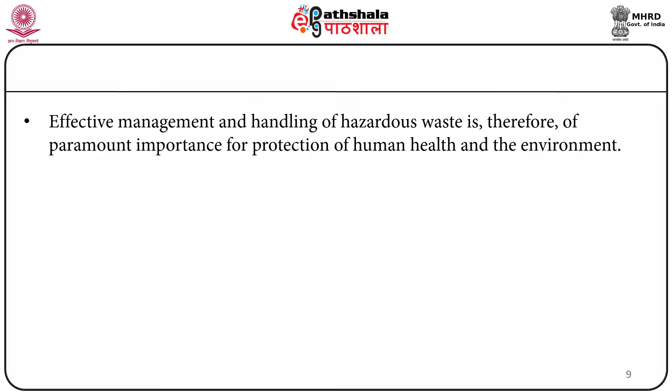The hazardous waste can cause or significantly contribute to an increase in mortality or an increase in serious illness. They can pose a substantial present or potential hazard to human health or the environment when it is improperly treated, stored, transported, disposed of, or otherwise managed. Effective management and handling of hazardous waste is therefore of paramount importance for protection of human health and the environment.

In India, rapid economic growth is leading to urbanization and industrialization, generating large amounts of waste, which is adversely affecting the environment. The Hazardous Waste Management, Handling and Transboundary Movement Rules 2008 are the primary regulations addressing the management of hazardous waste in India.

What is hazardous waste? How to define it? From the viewpoint of application of the hazardous waste management and handling rules, waste can be classified as hazardous if the waste substance is solid, semi-solid, or non-aqueous liquid which, because of its quantity, concentration, or physical, chemical, or infectious characteristics may cause or significantly contribute to an increase in mortality or an increase in serious, irreversible, or incapacitating reversible illness, or pose a substantial present or potential hazard to human health or the environment when it is improperly treated, stored, transported, or disposed of or otherwise managed.

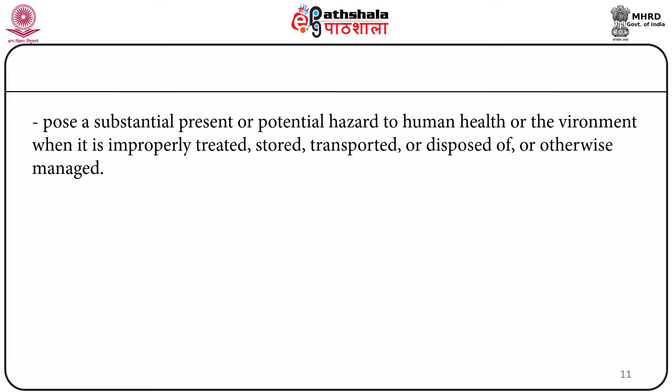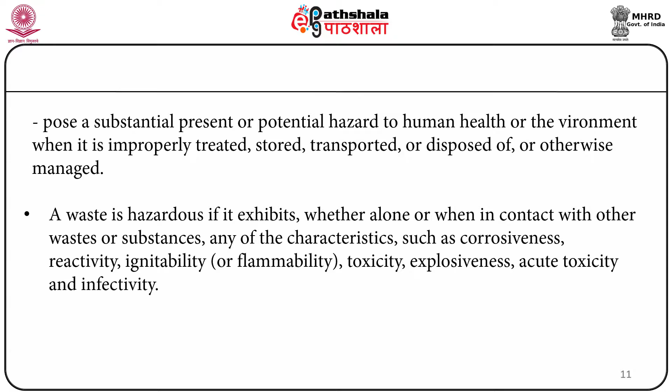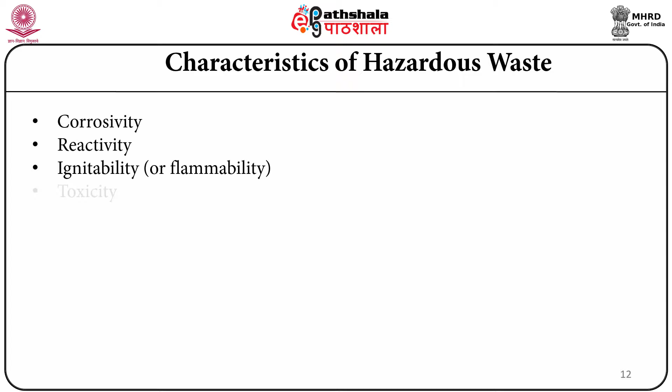A waste is hazardous if it exhibits, whether alone or when in contact with other waste or substances, any of the characteristics such as corrosiveness, reactivity, ignitability or flammability, toxicity, explosiveness, acute toxicity, and infectivity. What are the characteristics of hazardous waste? These are corrosivity, reactivity, ignitability or flammability, toxicity, explosiveness, acute toxicity, infectivity.

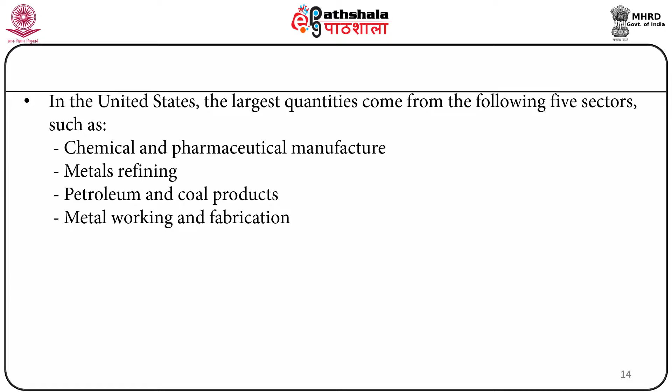In the United States, the largest quantities come from the following 5 sectors, such as chemical and pharmaceutical manufacture, metals refining, petroleum and coal products, metal working and fabrication, rubber and plastics manufacture.

Most hazardous waste in India are generated by highly polluting industries that fall into 17 major categories. And these are aluminium smelter, caustic soda, cement, copper smelter, distilleries, drugs and pharmaceuticals, dyes and dye intermediates, fertilizer, integrated iron and steel, leather processing including tanneries, oil refineries, pesticides, petrochemicals, pulp and paper, sugar, thermal power plants, and zinc smelter.

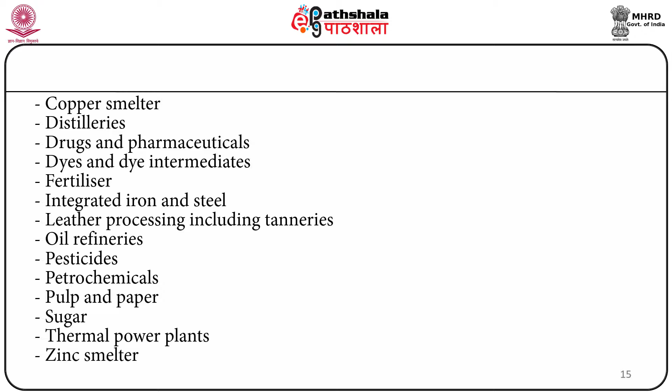Next, classification of hazardous waste. Hazardous waste can be classified by list, for example, United States Environmental Protection Agency list. It can be classified by origin, for example, specific processes generating hazardous waste. Classification by hazardous characteristics, for example, toxic waste, reactive waste. Classification by chemical, biological and physical properties, for example, inorganic waste, organic waste.

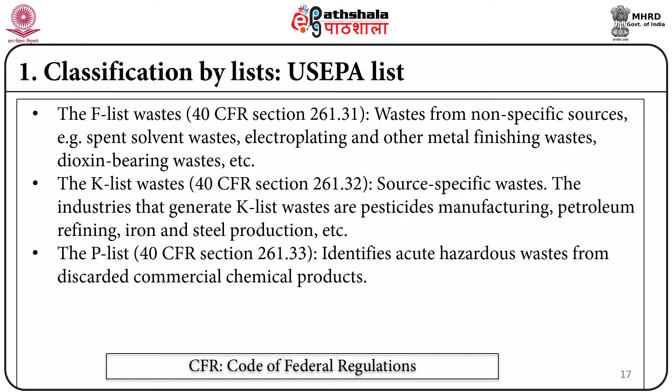First, classification by list, that is USEPA list. The F list: waste from non-specific sources, for example, spent solvent waste, electroplating and other metal finishing waste, dioxin bearing waste, etc. Next, the K list waste. Those are source-specific waste. The industries that generate K-list waste are pesticides manufacturing, petroleum refining, iron and steel production, etc.

The P-list identifies acute hazardous waste from discarded commercial chemical products. And lastly, the U-list identifies hazardous waste from discarded commercial chemical products. Here, CFR denotes Code of Federal Regulations.

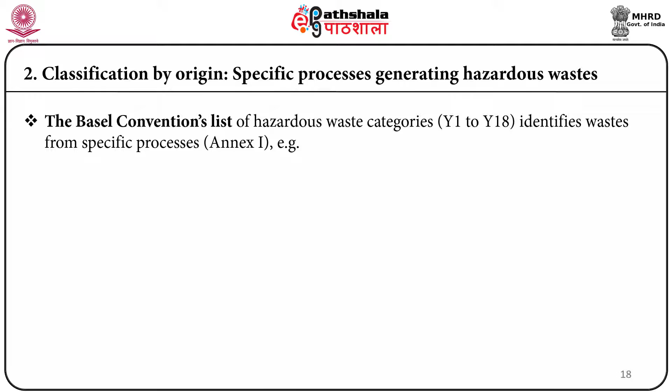Next, classification by origin, that is specific processes generating hazardous waste. The Basel Convention's list of hazardous waste categories Y1 to Y18 identifies waste from specific processes. For example, Y1 denotes clinical waste, Y6 denotes waste from the production and use of organic solvents, and Y18 denotes residues from industrial waste disposal operations.

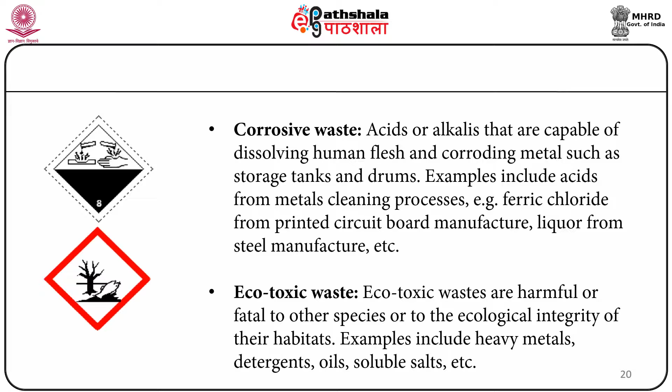Reactive waste are unstable under normal conditions, can cause explosions, toxic fumes, gases, or vapors. Examples include peroxide solutions, hypochlorite solutions, or solids, etc. Next, corrosive waste. Acids or alkalis that are capable of dissolving human flesh and corroding metals such as storage tanks and drums. Examples include acids from metals cleaning processes, for example, ferric chloride from printed circuit board manufacture, liquor from steel manufacture, etc. And lastly, ecotoxic waste. These are harmful or fatal to other species or to the ecological integrity of their habitats, and examples include heavy metals, etc.

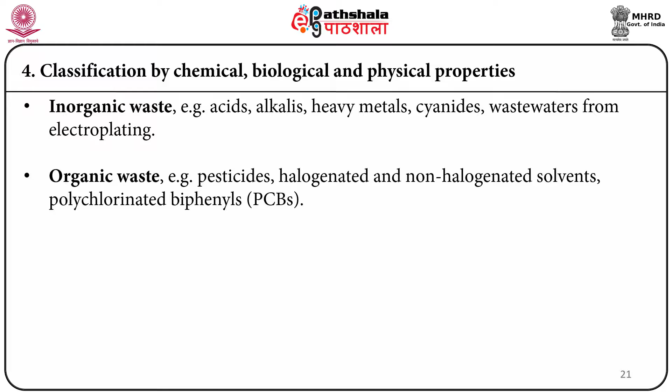Next, classification is possible by chemical, biological, and physical properties of hazardous waste, like inorganic waste, for example, acids, alkalis, heavy metals, cyanides, wastewaters from electroplating; organic waste, for example, pesticides, halogenated and non-halogenated solvents, polychlorinated biphenyls; oily waste, for example, lubricating oils, hydraulic fluids, contaminated fuel oils; and sludge, for example, from metal working, painting, wastewater treatment.

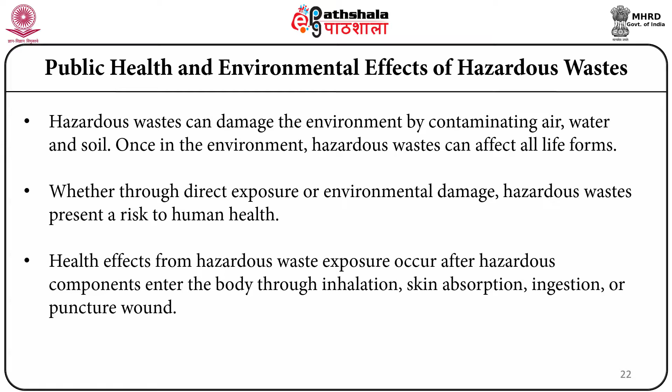Next, coming to public health and environmental effects of hazardous waste. Hazardous waste can damage the environment by contaminating air, water, and soil. Once in the environment, hazardous waste can affect all life forms. Whether through direct exposure or environmental damage, hazardous waste present a risk to human health. Health effects from hazardous waste exposure occur after hazardous components enter the body through inhalation, skin absorption, ingestion, or puncture wound. These threats vary greatly depending on the type of hazardous waste at issue. The health effects of the hazardous waste are also dependent on the amount and routes and duration of exposure.

Temporary health effects of hazardous waste exposure can include dizziness, headaches, and nausea. Prolonged exposure can result in cancers, disabilities, or death. Long-term exposure may also increase the risk of developmental and reproductive disorders, immune system disruption, endocrine disruption, central nervous system disorders. Safety effects resulting from hazardous waste include injury and even death from an explosion, fire outbreak, chemical reaction, or other hazardous situation created by such waste.

Contamination of soil, groundwater, surface water, and other media degrade the functioning of ecosystems by affecting the health of various plant and animal species. The effects vary widely from site to site depending on the species, contaminant, and ecosystem involved. In addition to harming plant and animal communities, these changes can lead to a reduction in the benefits, both direct and indirect, that ecosystems provide to humans.

Next, existing scenario of hazardous waste management in India. As a rapidly developing nation, India is struggling with the growing challenge of managing its hazardous waste.

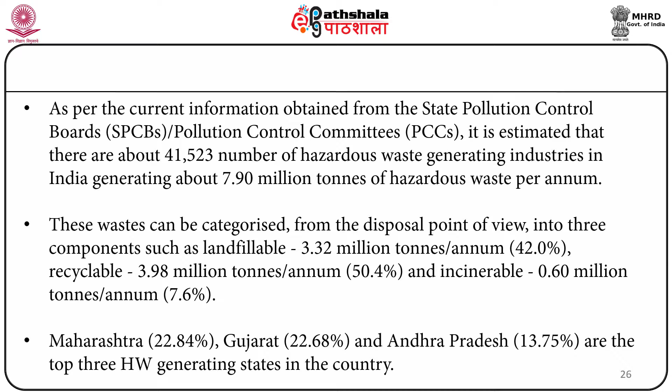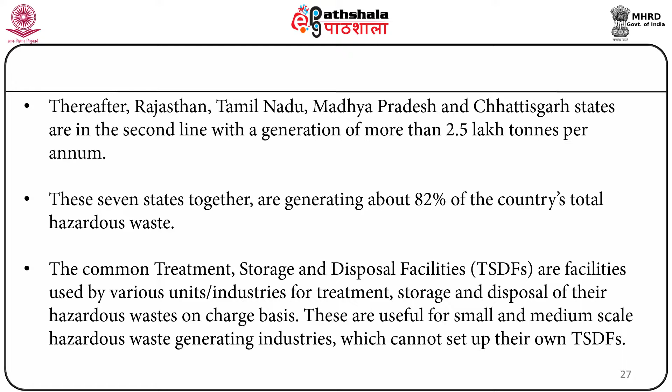tons per annum. Maharashtra, Gujarat, and Andhra Pradesh are the top three hazardous waste generating states in India. Thereafter, Rajasthan, Tamil Nadu, Madhya Pradesh, and Chhattisgarh states are in the second line with a generation of more than 2.5 lakh tons per annum. These 7 states together are generating about 82% of the country's total hazardous waste.

The common treatment, storage, and disposal facilities, that is TSDFs, are facilities used by various units or industries for treatment, storage, and disposal of their hazardous waste on charge basis. These are useful for small and medium scale hazardous waste generating industries which cannot set up their own TSDFs. The common TSDFs may have only secured landfill facilities or both secured landfill and incineration facilities, that is integrated common TSDFs.

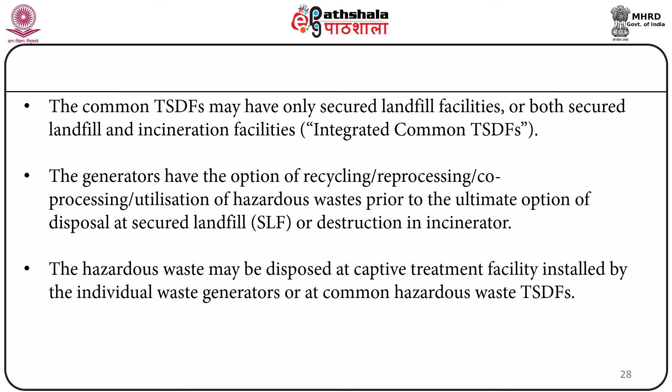The generators have the option of recycling or reprocessing or co-processing or utilization of hazardous waste prior to the ultimate option of disposal at secured landfill or destruction in incinerator. The hazardous waste may be disposed at captive treatment facility installed by the individual waste generators or at common hazardous waste TSDFs. Disposal at TSDFs is advantageous as compared to the captive facility because of reasons such as reduced capital investment, reduced cost of treatment, checking the mushrooming of treatment equipment in an area, easy implementation by the regulatory bodies, etc.

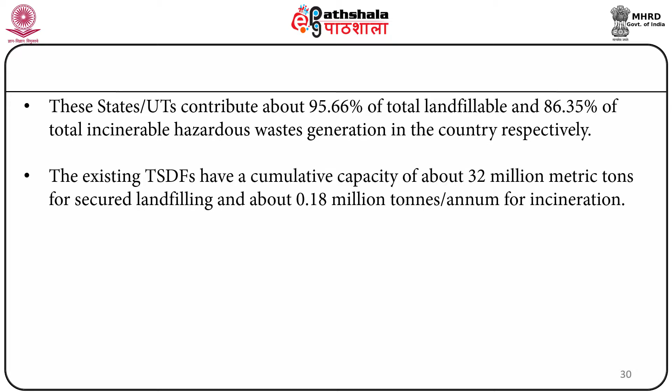The number of TSDFs in the country has increased gradually from 4 facilities in the year 2003 to 38 TSDFs in 16 states or union territories currently. Common facilities for disposing hazardous waste with secured landfills and incinerators are now available in 16 and 12 states or union territories respectively. These states or union territories contribute about 95.66% of total landfillable and 86.35% of total incinerable hazardous waste generation in the country respectively. The existing TSDFs have a cumulative capacity of about 32 million metric tons for secured landfilling and about 0.18 million tons per annum for incineration.

Currently, there are 38 TSDFs including 17 integrated TSDFs with both secured landfill and incineration facilities, 8 TSDFs with only common incineration facilities, and 13 TSDFs with only common secured landfill facilities. A project on GIS, that is Geographical Information Systems based National Hazardous Waste Information System, has been initiated to provide status of hazardous waste management in the country.

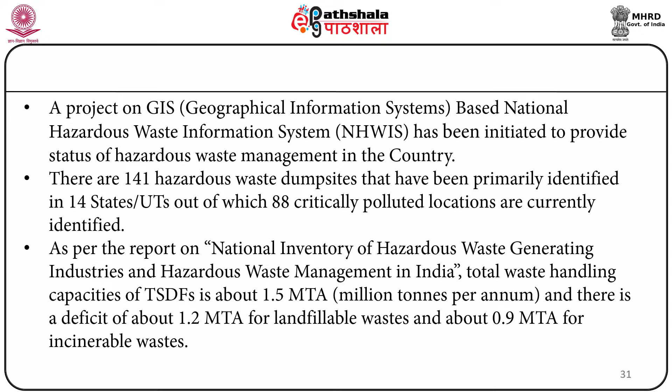There are 141 hazardous waste dump sites that have been primarily identified in 14 states or union territories, out of which 88 critically polluted locations are currently identified. As per the report on National Inventory of Hazardous Waste Generating Industries and Hazardous Waste Management in India, total waste handling capacity of TSDFs is about 1.5 million tons per annum, and there is a deficit of about 1.2 million tons per annum for landfillable waste and about 0.9 million tons per annum for incinerable waste.

Next, handling and management of hazardous waste in India. In India, rapid economic growth coupled with urbanization and industrialization is leading to the generation of large amounts of waste, which needs to be properly handled and managed to reduce its adverse impacts on human health and the environment. National Hazardous Waste Management Strategy incorporates the essence of the National Environmental Policy 2006, relevant multilateral environmental agreements like the Basel Convention, and the national regulations.

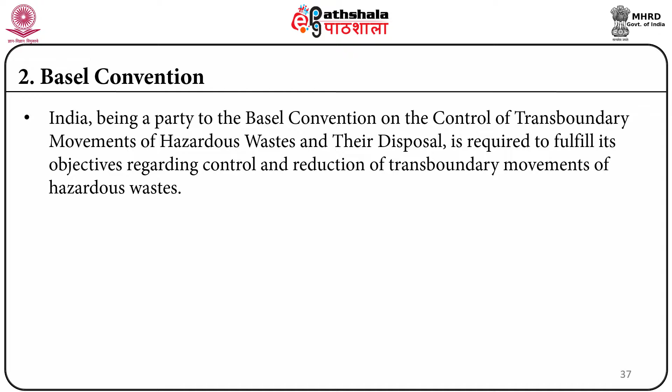Next, Basel Convention. India, being a party to the Basel Convention on the control of transboundary movements of hazardous waste and their disposal, is required to fulfill its objectives regarding control and reduction of transboundary movements of hazardous waste. Other objectives of the Convention include prevention and minimization of generation of such waste, promotion of their environmentally sound management, and active promotion of the transfer and use of cleaner technologies.

Next is regulatory framework. To regulate management of hazardous waste generated within the country as well as export or import of such waste, the Hazardous Waste Management and Handling Rules 1989 were notified under the Environment Protection Act 1986. The rules were amended extensively over the years. The Ministry of Environment and Forest has notified the Hazardous Waste Management, Handling and Transboundary Movement Rules 2008, repealing the earlier rules so as to make the rules more practical and effective in implementation.

The National Hazardous Waste Management Strategy is being finalized for effective management of hazardous waste so as to avoid environmental pollution and adverse effects due to improper handling and disposal. A coordination mechanism for effective implementation of the Hazardous Waste Rules 2008 by the custom authorities at the ports has been established. The Hazardous Waste Rules 2008 are the primary regulations addressing the management of hazardous waste in India. Recycling of e-waste has also been addressed under these rules.

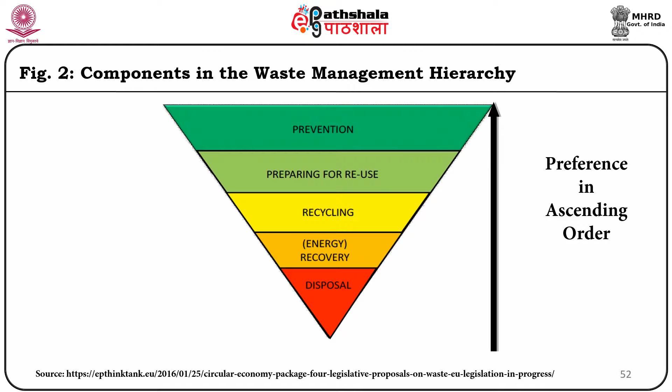This figure shows components in the waste management hierarchy, and here you can see the preferences have been shown in ascending order. The first option should be prevention, followed by preparing for reuse, recycling and recovery, and the disposal should be the last.

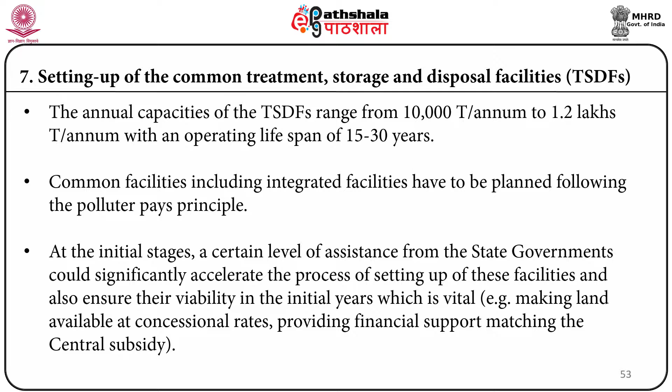Next, setting up of the common treatment, storage and disposal facilities. The annual capacities of the TSDFs range from 10,000 tons per annum to 1.2 lakhs tons per annum with an operating lifespan of 15 to 30 years. Common facilities, including integrated facilities, have to be planned following the polluter pays principle. That is, the principle which makes the polluter responsible for the pollution they have produced. They should pay for the damage they have made by producing pollution.

At the initial stages, a certain level of assistance from the state government would significantly accelerate the process of setting up of these facilities and also ensure their viability in the initial years, which is vital. For example, making land available at concessional rates, providing financial support matching the central subsidy. Location of TSDF should be close to the sources of generation.

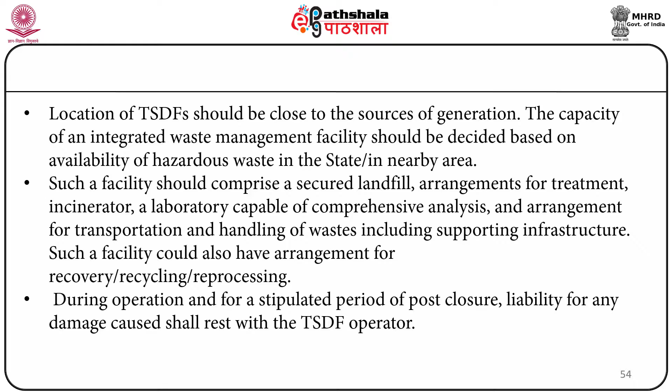The capacity of an integrated waste management facility should be decided based on availability of hazardous waste in the state or in nearby area. Such a facility should comprise a secured landfill, arrangements for treatment, incinerator, a laboratory capable of comprehensive analysis and arrangement for transportation and handling of waste, including supporting infrastructure. Such a facility could also have arrangement for recovery, recycling or reprocessing. During operation and for a stipulated period of post-closure, liability for any damage caused shall rest with the TSDF operator.

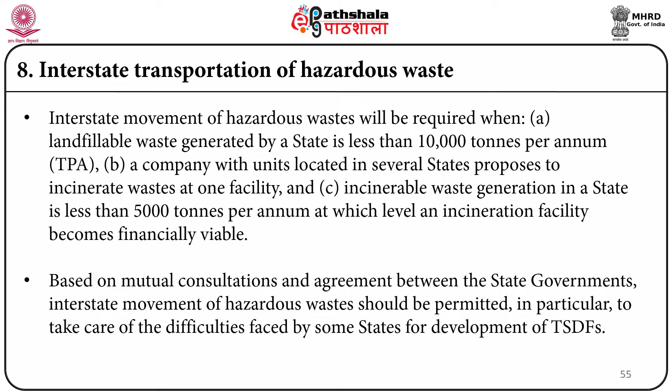Next is interstate transportation of hazardous waste. Interstate movement of hazardous waste will be required when landfillable waste generated by a state is less than 10,000 tons per annum, a company with units located in several states proposes to incinerate waste at one facility, and incinerable waste generation in a state is less than 5,000 tons per annum, at which level an incineration facility becomes financially viable. Based on mutual consultations and agreement between the state governments, interstate movement of hazardous waste should be permitted, in particular to take care of the difficulties faced by some states for development of TSDFs.

For proper tracking of hazardous waste disposal in an environmentally sound manner by the SPCBs or PCCs, the manifest system, that is the movement document of hazardous waste, shall be followed as per the hazardous waste regulations. The SPCB or PCC should develop an online tracking system for movement of hazardous waste from generation to the disposal, recovery or recycle stage.

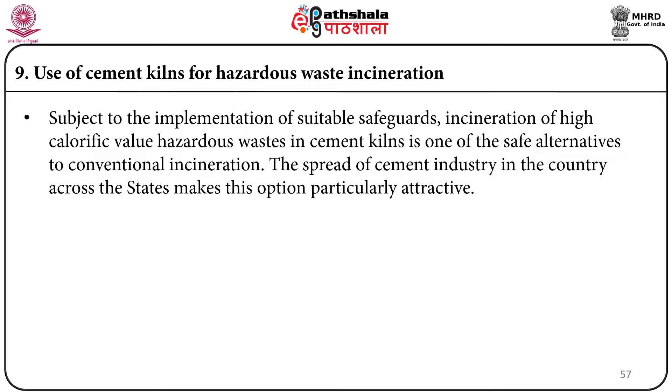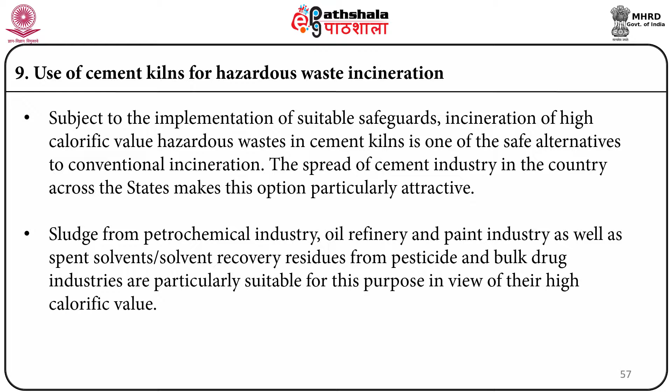Next is use of cement kilns for hazardous waste incineration. Subject to the implementation of suitable safeguards, incineration of high calorific value hazardous waste in cement kilns is one of the safe alternatives to conventional incineration. The spread of cement industry in the country across the states makes this option particularly attractive. Sludge from petrochemical industry, oil refinery and paint industry as well as spent solvents or solvent recovery residues from pesticide and bulk drug industries are particularly suitable for this purpose in view of their high calorific value.

Next is illegal dump sites and remediation. Remediation or rehabilitation of dump sites should be based on scientific assessment of contamination of soil and groundwater and based on modeling the projected future damage.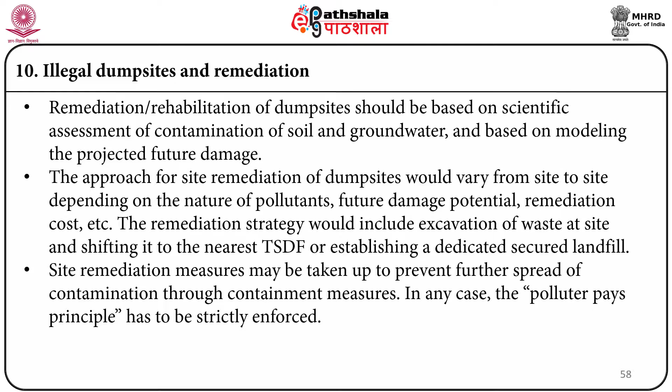The approach for site remediation of dump sites would vary from site to site depending on the nature of pollutants, future damage potential, remediation cost, etc. The remediation strategy would include excavation of waste at site and shifting it to the nearest TSDF or establishing a dedicated secured landfill. Site remediation measures may be taken up to prevent further spread of contamination through containment measures. In any case, the polluter pays principle has to be strictly enforced.

Next is strengthening of infrastructure of regulatory bodies. The mantle of hazardous waste management regulation is primarily on the SPCBs at the state level. For effective discharge of their responsibility, the boards have to be strengthened in terms of manpower, equipment, instruments, and other infrastructure facilities. The Customs Department plays an important role in regulating import of hazardous waste into the country.

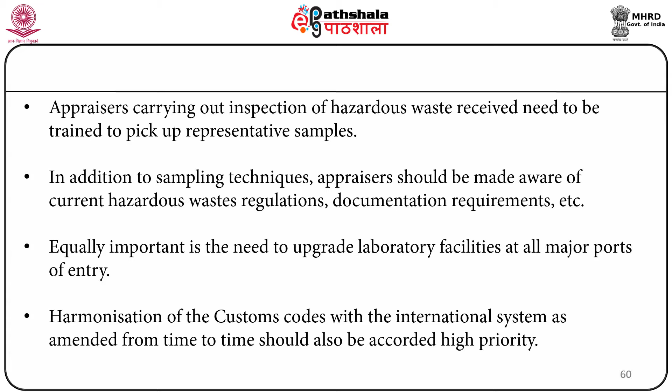Priority areas for action include harmonization of EXIM, that is the export-import policy regulations, with the provisions of the hazardous waste rules, training of the Customs Department personnel engaged in inspection and sampling, and also upgradation of the Customs Department laboratories. Appraisers carrying out inspection of hazardous waste received need to be trained to pick up representative samples. In addition to sampling techniques, appraisers should be made aware of current hazardous waste regulations, documentation requirements, etc.

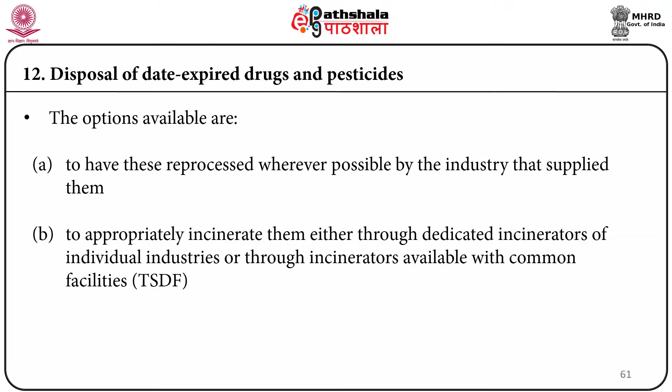Equally important is the need to upgrade laboratory facilities at all major ports of entry. Harmonization of the customs codes with the international system as amended from time to time should also be accorded high priority. Next is disposal of date-expired drugs and pesticides. The options available are to have these reprocessed wherever possible by the industry that supplied them. And the next option is to appropriately incinerate them either through dedicated incinerators of individual industries or through incinerators available with common facilities.

And the last is handling and management of hazardous waste during ship dismantling. These include used oil, waste oil, asbestos containing panels or tiles, damaged asbestos containing material, paint chips, and unused chemicals like acids, etc. Some of these materials can be used directly, such as asbestos panels, unused chemicals, etc. Some can be sold to recyclers, and others need to be disposed of in the TSDFs. Adequate safety systems and procedures need to be adopted during dismantling and handling of these materials or wastes. This activity is required to be regulated through the state maritime boards, SPCBs, and factory inspectors as per the comprehensive code of the Ministry of Steel.

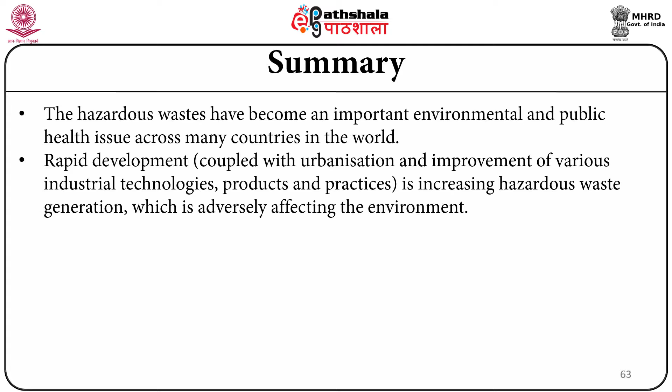So to summarize, hazardous waste has become an important environmental and public health issue across many countries in the world. Rapid development coupled with urbanization and improvement of various industrial technologies, products and practices is increasing hazardous waste generation, which is adversely affecting the environment. Any waste that, by virtue of any of its physical, chemical, reactive, toxic, flammable, explosive, or corrosive characteristics causes danger or is likely to cause danger to human health or the environment, whether alone or when in contact with other waste or substances, is defined as hazardous waste.

The hazardous waste substance can be solid, semi-solid, or non-aqueous liquid. Some examples of hazardous waste include used or spent oil, discarded asbestos, pesticides, solvents, etc. Some common industrial sources of hazardous waste include chemical and pharmaceutical manufacture, petroleum and coal products, metals refining, etc. Hazardous waste may cause explosion or fire, infection, chemical instability, reactions or corrosion, acute or chronic toxic effects, cancer, mutations or birth defects, or damage to ecosystems or natural resources.

Management of waste in an environmentally sustainable manner is a challenging task. In addition to proper hazardous waste disposal or, if necessary, remediation of contaminated sites, it is important to minimize the production and impact of hazardous waste and to recover and recycle resources where feasible. The Hazardous Waste Management, Handling and Transboundary Movement Rules 2008 are the primary regulations addressing the management of hazardous waste in India. The common treatment, storage and disposal facilities are facilities used by various units or industries for treatment, storage and disposal of their hazardous waste on charge basis.